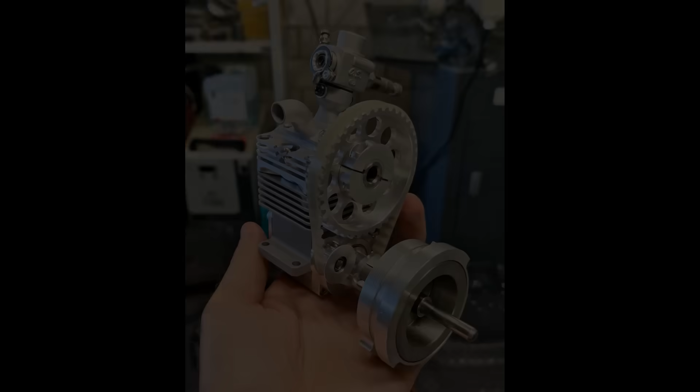The last video was about this engine. The aim was to build a one-valve cylinder head with a rotary valve. The principle is simple: a rotary valve with only one continuous opening slot controls the inlet and outlet at the same time. As this only needs 180 degrees for 4 cycles, the rotary valve rotates at a ratio of 1:4 to the crankshaft.

Here you can see what it looked like in the finished cylinder head. I think you can see the function and the principle very well.

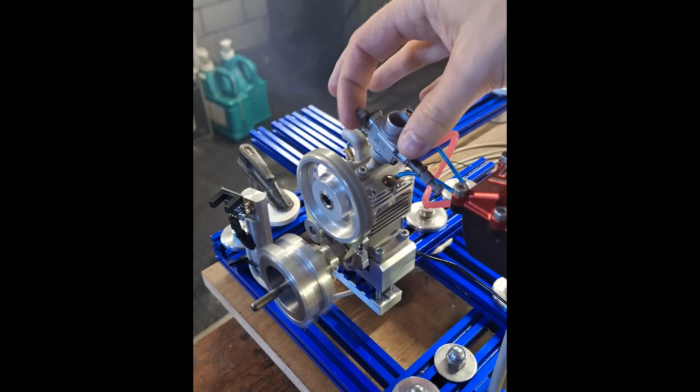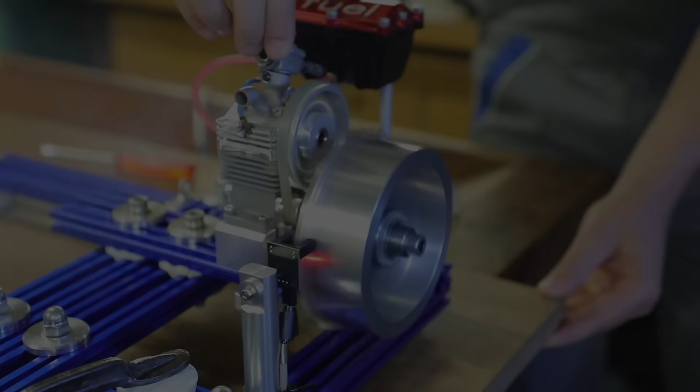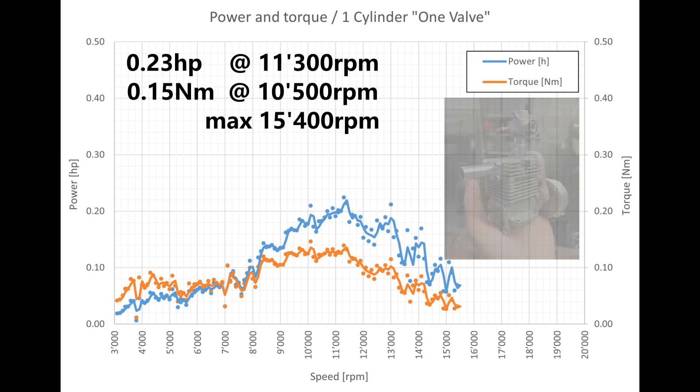But the performance measurement brought sobering results. An output of 0.23 horsepower from a displacement of 6.5 cubic centimeters was a disappointment. My current design of a rotary valve cylinder head with 2 valves produces 0.6 horsepower. To put it simply, much more powerful.

What do we do now? Should I give up? Of course not. I had an idea for a new one-valve cylinder head with rotary valve. Let's take a look at that today.

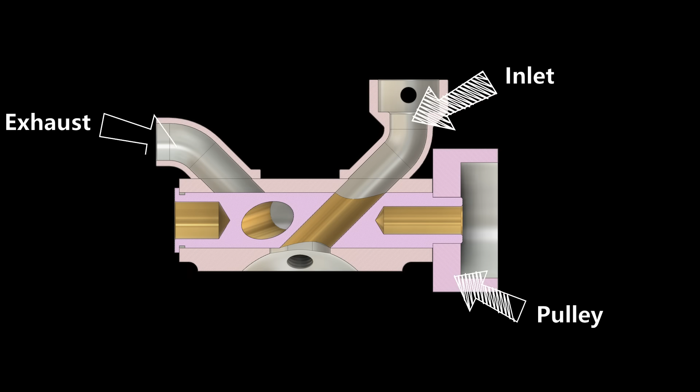Here it is. Here you can see a cross-section of the new one-valve cylinder head with rotary valve from the CAD. I would now like to explain how it works. Here is the timing belt pulley. Here is the inlet where the carburetor is screwed on. Here is the outlet. This is the rotary valve. Here is my hemispherical combustion chamber with double glow plug.

The rotary valve is in the intake stroke here. The fresh gas enters the combustion chamber with virtually no obstructions. My aim was to make the design as flow-optimized as possible.

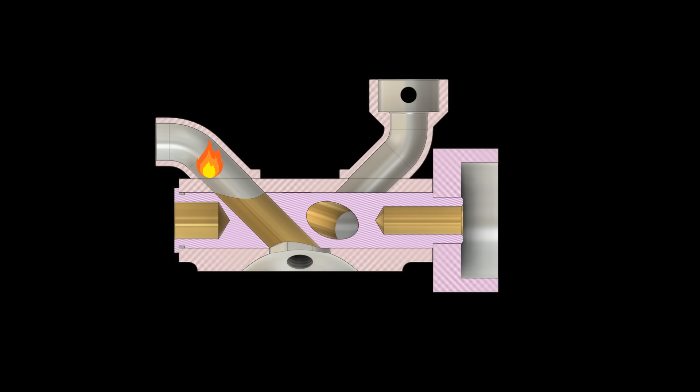I designed the same principle for the outlet. The exhaust gas can flow out through the outlet almost unhindered.

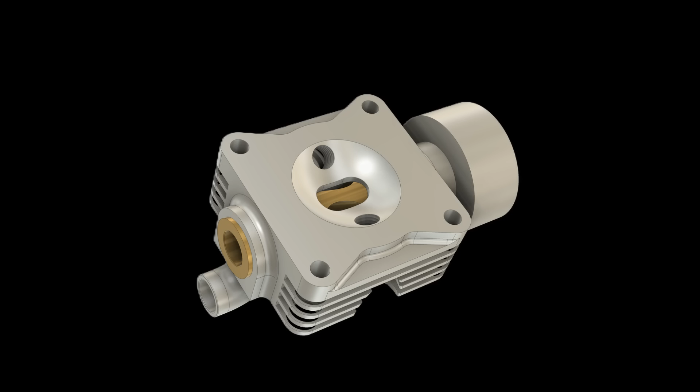Let's take a closer look at the combustion chamber. The rotary valve is centrally arranged. The valve position in the picture is at top dead center of the piston, meaning the change from exhaust to intake stroke. You can see the exhaust valve closing and the inlet valve opening. This is the exhaust opening in the rotary valve, and this here, the inlet opening.

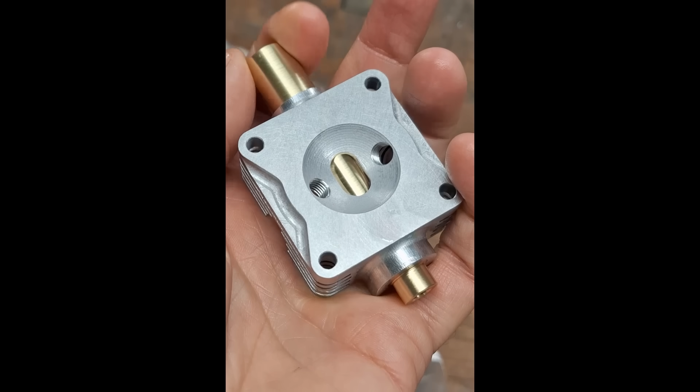To make this easier to understand, let's fast forward and look at the function directly in the finished cylinder head. Here you can see the one-valve technology quite clearly in the overlapping valves. Here you can see that the gas simply can pass straight through the head.

This is the top side with the 2 connections for the carburetor and the exhaust.

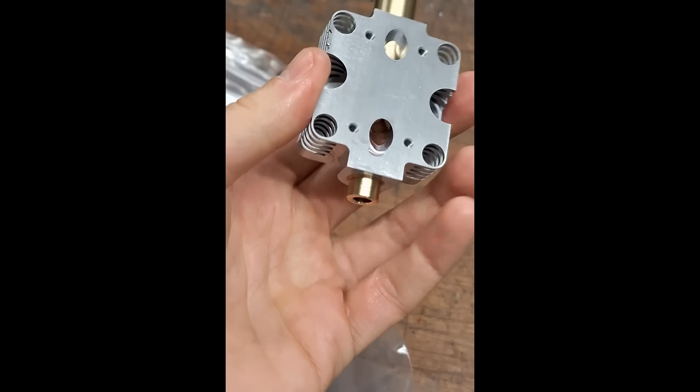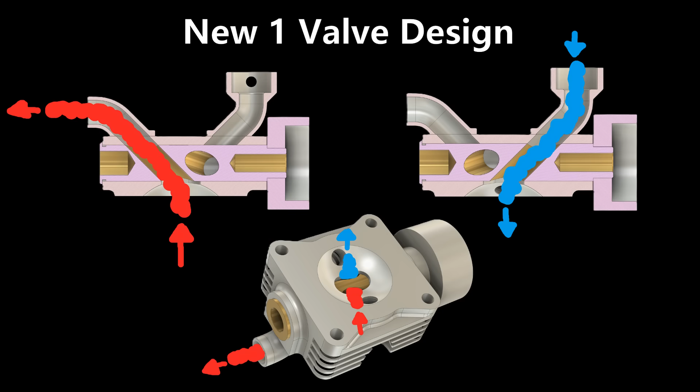So why all the effort? What is the benefit compared to the previous cylinder head? In my previous design, the inlet and outlet shared the same valve opening in the rotary valve. This isn't a good solution, as the outflowing gas blocks the incoming fresh gas, so a proper gas exchange isn't possible. The new design solves this problem as the inlet and outlet are separated from each other, but they still share the valve opening in the cylinder head. It's still a one-valve design.

I then started to manufacture the cylinder head.

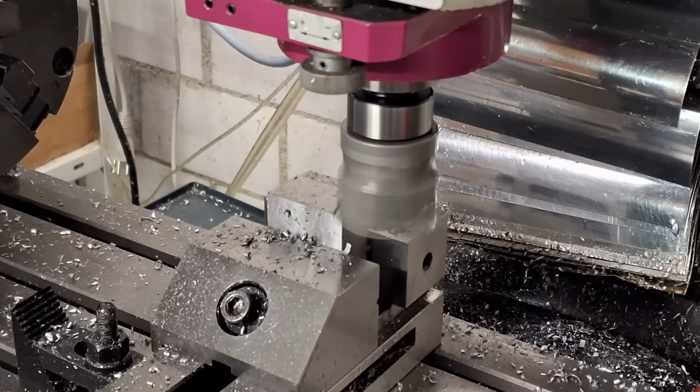A few details about the cylinder head: this is made from ENAC 47000, an aluminum alloy with 12% silicon in it. This alloy has very good sliding properties and is also wear resistant. The rotary valve will also run directly on this aluminum without a cast iron sleeve, as I had in the past.

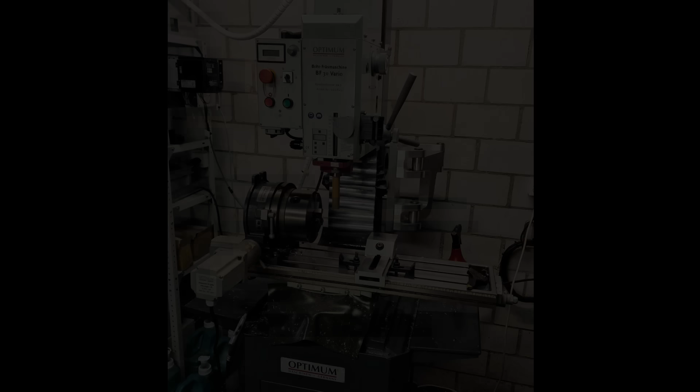I'm often asked how I manufacture my parts. I have simple equipment at home. A cylinder head like this requires a lot of fixtures, operations, and especially time. The cylinder head, for example, took me around 12 hours to make.

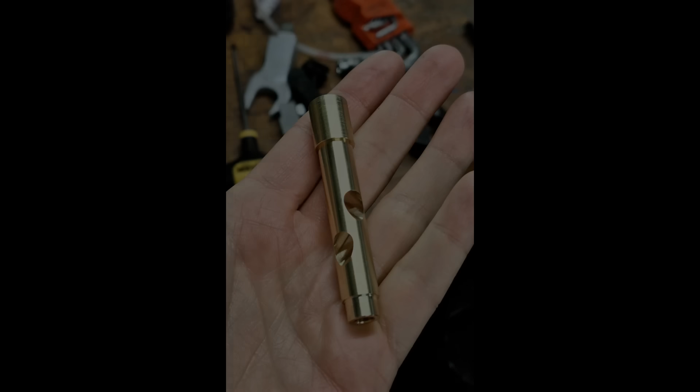Now let's move on to the rotary valve. I have made two versions, one out of bronze and one out of cast iron. The ones in the picture are still the blanks. The material makes no difference in production. It's all about the sliding properties and thermal expansion.

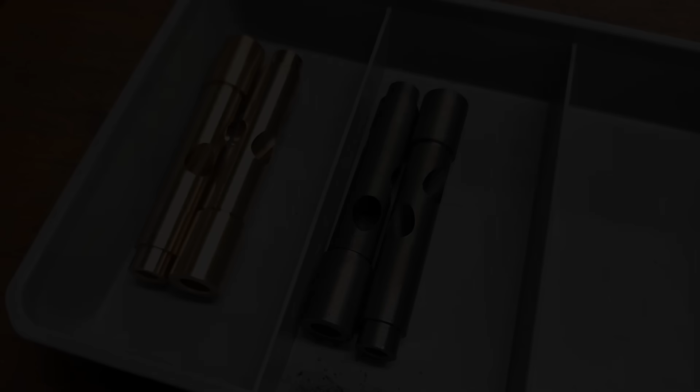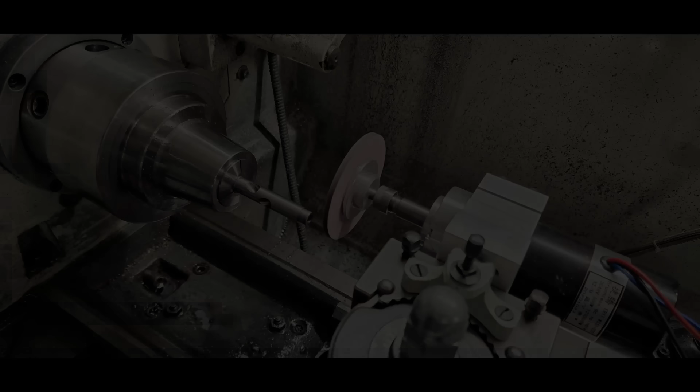Since the rotary valve heats up more than the cylinder head, you have to be careful that it doesn't expand too much during operation and then block. As the selected bronze alloy has a similar thermal coefficient of expansion as the aluminum of the cylinder head, I decided to use cast iron instead. This fits with the thermal expansion, and the sliding properties of this material pairing are also very good.

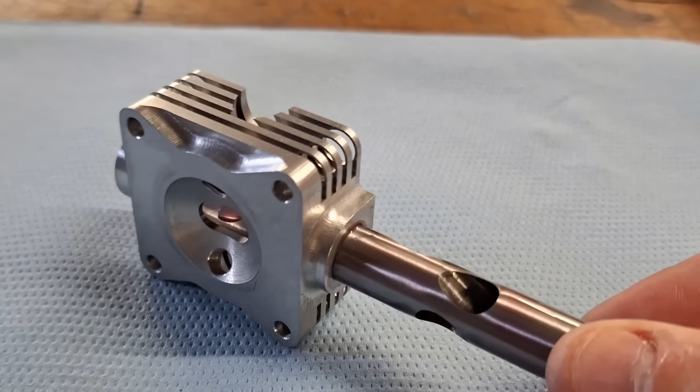The rotary valve is ground and the cylinder head is honed, a tried and tested combination. The clearance of the rotary valve is 5 micrometers on the intake side and 10 micrometers on the exhaust side. As the rotary valve heats up more on the exhaust side, the bore in the cylinder head is therefore slightly conical to compensate for that. Here are a few words about how I hone.

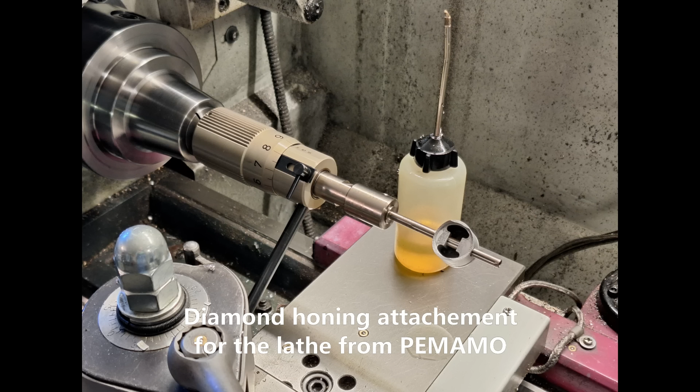I use a honing attachment for the lathe with a diamond honing reamer. The honing attachment can be adjusted in 0.5 micrometer steps. The manufacturer of this tool is PEMAMO. For every nominal diameter, a different reamer is required.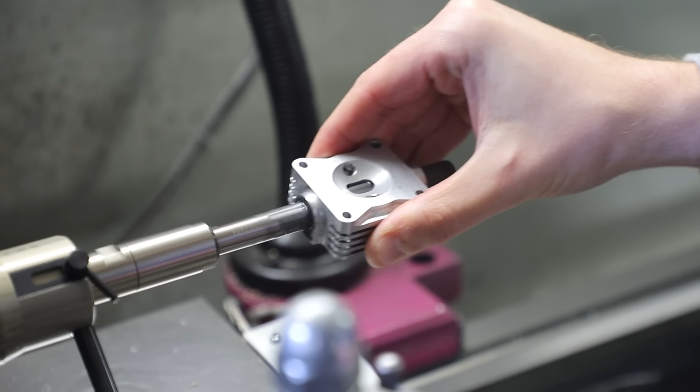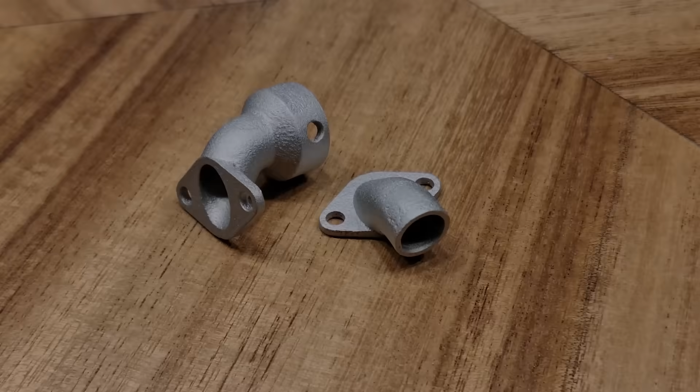The exhaust and the intake manifold are 3D printed from aluminum. That's pretty much it. This is what the engine looks like when assembled.

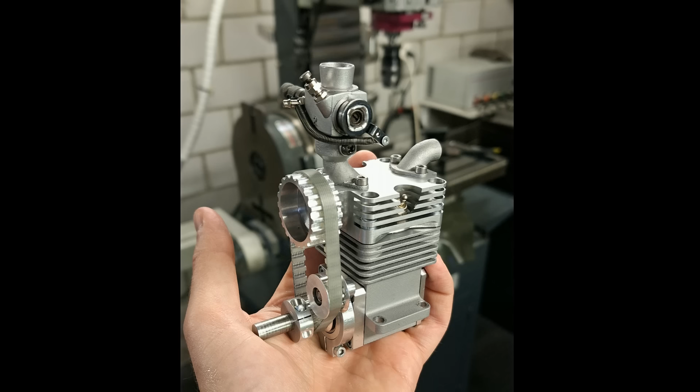You can see it runs and the throttle response is also good, but that doesn't say much. We now need to measure the performance. To do this, we mount my well-known high inertia flywheel and record the speed-up curve.

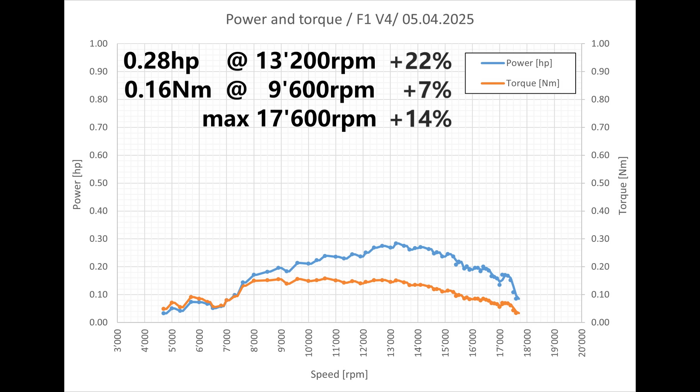We achieved 0.28 horsepower at 13,200 RPM and 0.16 Newton meters at 9,600 RPM. The maximum speed was 17,600 RPM. Compared to the old one-valve design, we were able to increase the power by 22%, the torque by 7%, and the speed by 14%. To be honest, this is still a bad result.

My rotary valve head with two separate valves and the same timing achieves 0.60 horsepower, which is much more than this one here. So what is my conclusion? One-valve cylinder heads aren't a good solution to get a high power output. They may be suitable for engines with low revs, but not for high revving engines like mine. Personally, I will not deal with this topic any further.